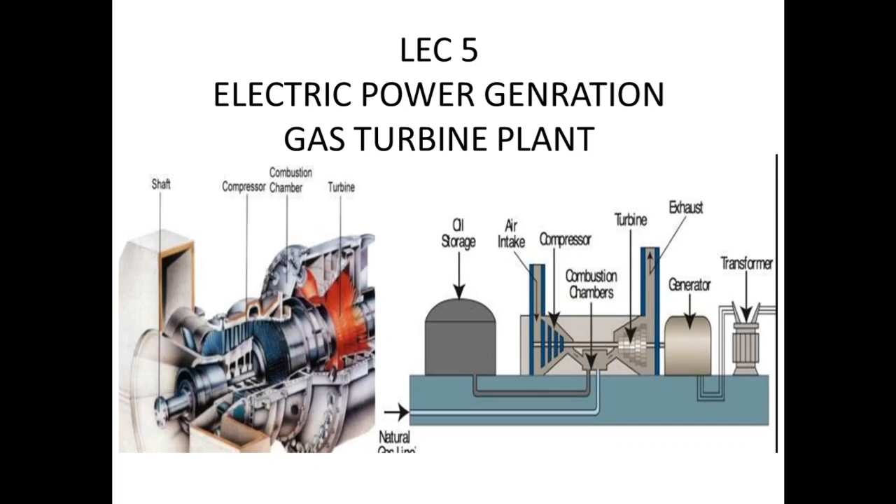In today's session, our topic is gas turbine plant. It is our lecture number 5 of the subject electrical power generation.

Gas turbine is similar in action to a steam turbine used in a thermal power station. Gas turbine plant is also in many respects similar to a thermal power plant. Instead of steam, a hot gas is used. In a steam power plant, the working medium is steam formed from water heated by burning the coal. In a gas plant, the working medium is either a mixture of combustion products and air or heated air at a certain pressure and high initial temperature.

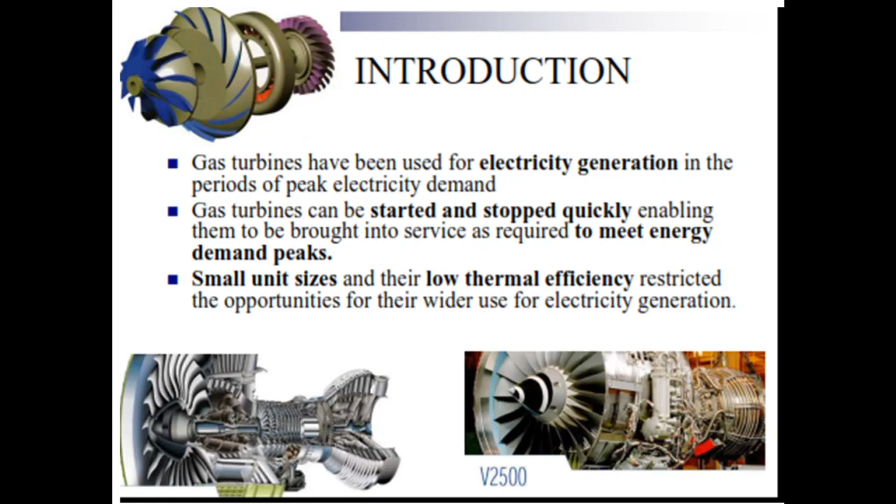Now, the thermal efficiency of the gas turbine is 20 to 30% compared with the modern steam power plant at 38 to 40%. In future, it is possible to construct with efficiency around 45%. Thermal efficiency of the gas turbine is 20 to 30% as compared with the steam power plant.

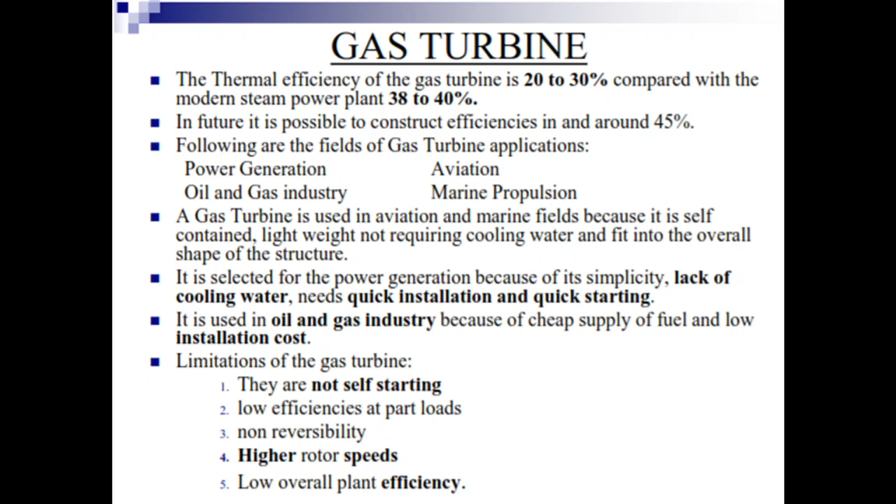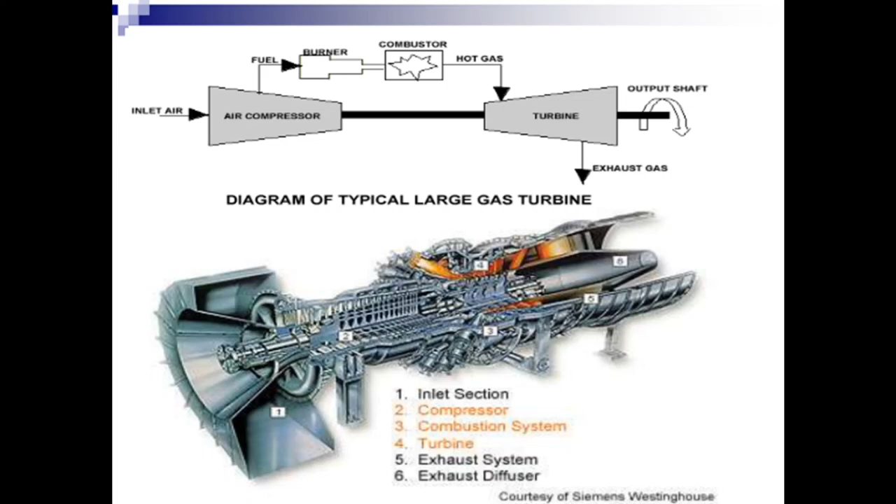This is the diagram of a typical large gas turbine. Here we see the inlet air compressor, combustor, burner, turbine. These are its main parts. Now again, this is the cross-sectional view of the gas turbine.

Now the compressor sucks the air through the filter from the atmosphere, then compresses the air and the pressure increases. It has rotary blades and stationary blades. The compressor is driven by the turbine as it is connected to the shaft of the turbine. The compressor is rotary type. Now, working of a simple gas turbine plant.

Gas turbine plant is defined as one in which the principle of the prime mover is of the turbine type and the working medium is a permanent gas. A simple gas turbine plant consists of turbine, compressor, combustor, auxiliary devices like a starting device, lubricating pump, fuel pump, oil system and duct system. The working fluid is compressed in a compressor which is generally rotary multistage type.

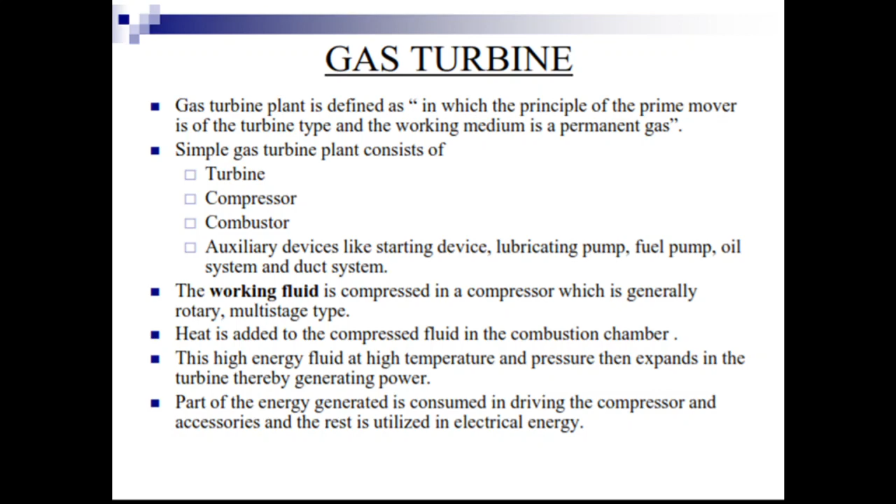Combustion takes place in the combustion chamber by fuel burning due to the high pressure stream of air supplied by the compressor. Part of the air is delivered ahead of burning fuel for cooling the hot combustion products from 1650 degrees to 800 degrees, which do not damage the turbine blades in the first rows. High pressure, high temperature gases pass through the turbine. They expand and the turbine starts rotating.

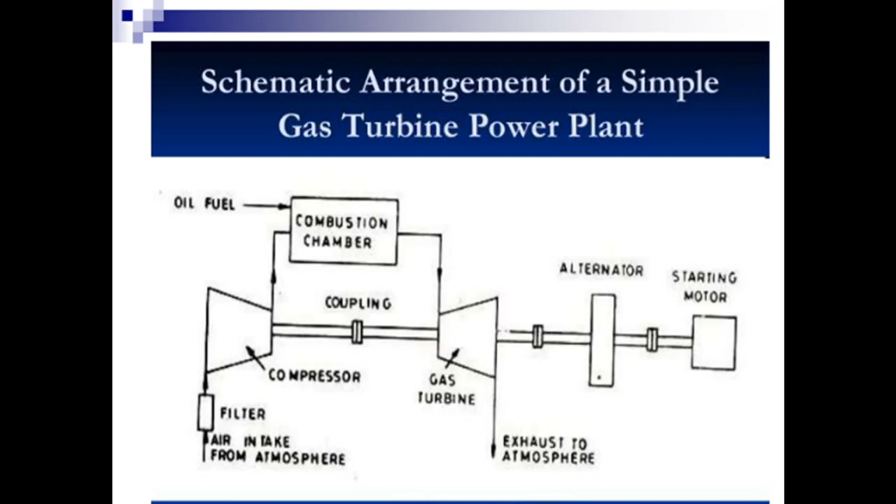Okay, now what are the advantages of the gas turbine power plant over the diesel plant? First one is the work developed per kg of air is more than diesel plant. Next one is the less vibration due to perfect balancing and no reciprocating parts.

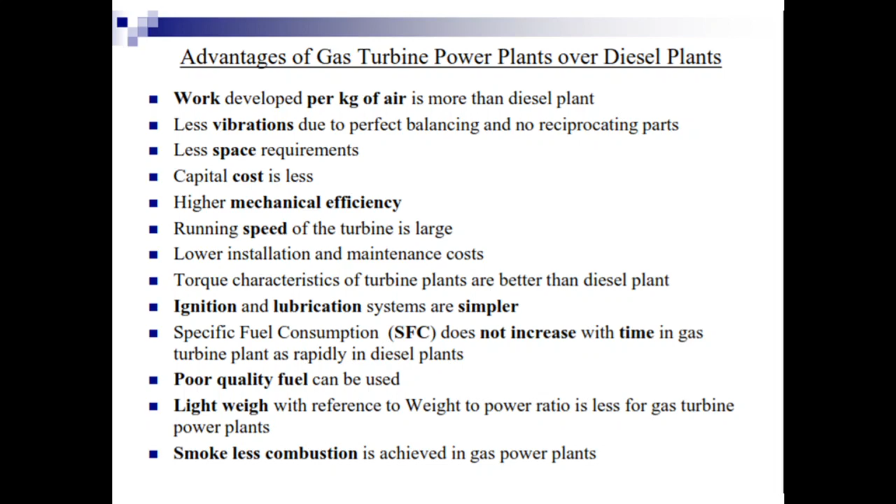Less space requirement, capital cost is less, higher mechanical efficiency, running speed of the turbine is large, lower installation and maintenance cost, torque characteristic of turbine plants are better than diesel plant, ignition and lubrication system are simple, specific fuel consumption does not increase with time in gas turbine plant as rapidly as in diesel plants, poor quality fuel can be used, lightweight with reference to weight to power ratio is less for gas turbine power plant. Smokeless combustion is achieved in gas power plant.

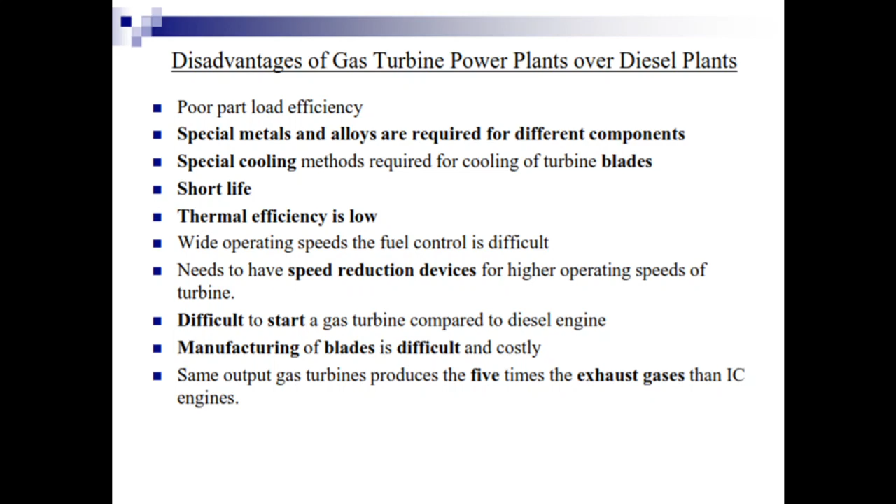What are the disadvantages of gas turbine power plant over diesel plants? Poor part load efficiency, special metals and alloys are required for different components, special cooling method required for cooling turbine blades, short life, thermal efficiency is low, wide operating speed, the fuel control is difficult, need to have speed reduction devices for higher operating speed of turbine, difficult to start a gas turbine compared to diesel engine, manufacturing of blades is difficult and costly, for the same output gas turbine produces 5 times the exhaust gases than IC engine.

Now what are the advantages over the steam plant? No ash handling, steam plant में ash handling plant रहता है, यहाँ पे ash produce नहीं होती, so there is no ash handling, low capital cost and running cost, space requirement is less, fewer auxiliaries are used, can be built relatively quicker, can be brought on load quickly to support peak load.

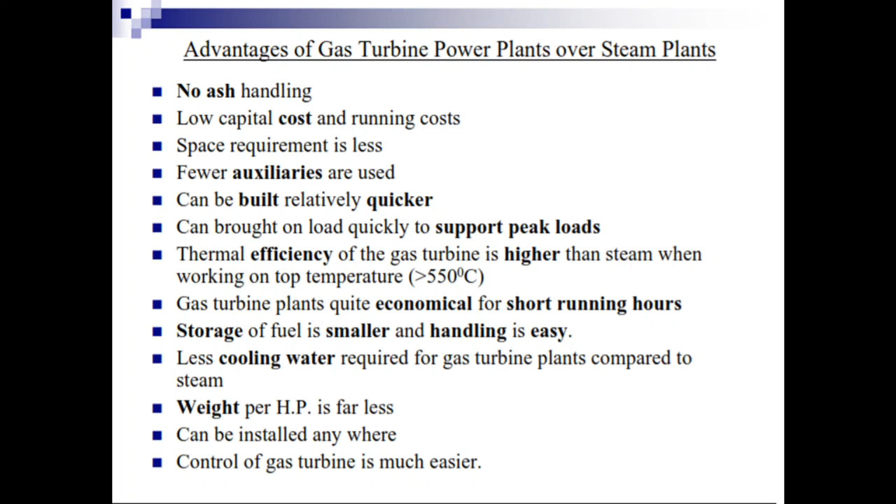Thermal efficiency of the gas turbine is higher than steam when working on top temperature. Gas turbine plants are quite economical for short running hours. Storage of fuel is smaller and handling is easy. Less cooling water required for gas turbine plant compared to steam. Weight per HP is far less. Can be installed anywhere. Control of gas turbine is much easier.

Now, what is the working principle of gas turbine? Air is compressed to high pressure by a compressor, then fuel and compressed air are mixed in a combustion chamber and ignited. Hot gases are given off which spin the turbine wheels.

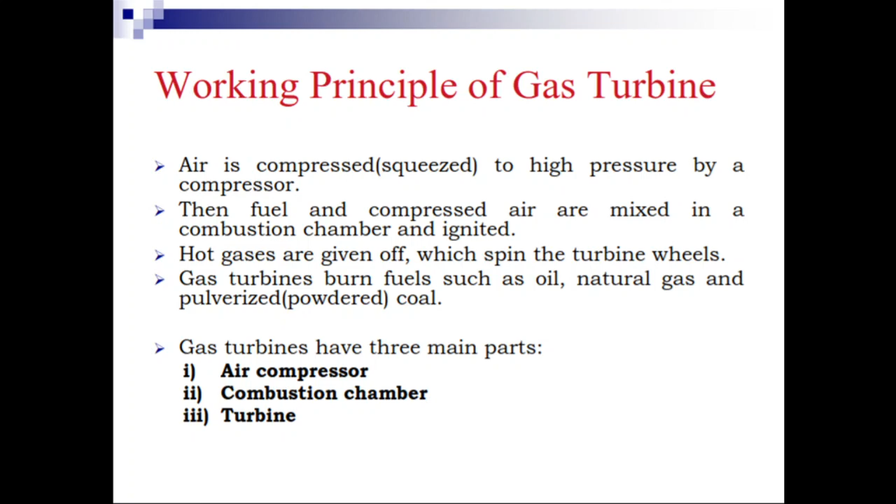Gas turbines burn fuels such as oil, natural gas and pulverized coal. Gas turbines have 3 main parts. First one is the air compressor, second one is the combustion chamber and third one is the turbine. Now what is the function of air compressor? The air compressor and turbine are mounted at either end on a common shaft with the combustion chamber between them.

Gas turbines are not self-starting. A starting motor is used. The air compressor sucks in air and compresses it, thereby increasing its pressure.

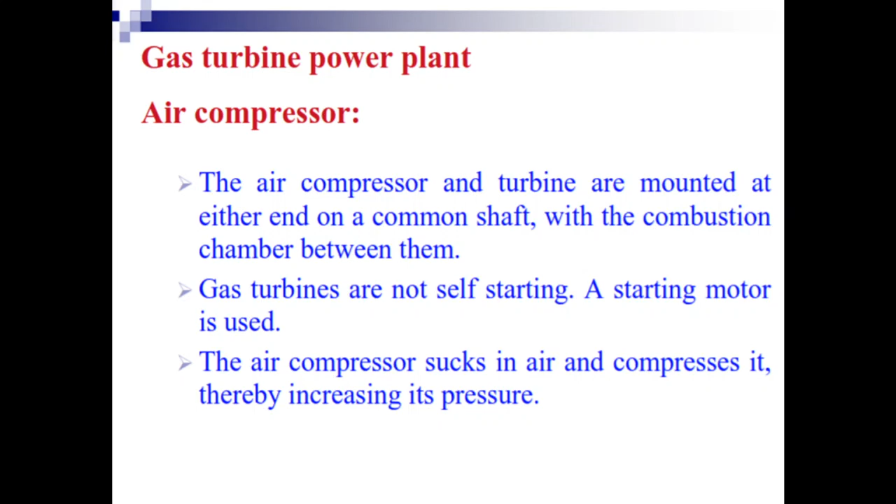The axial flow compressors are used in gas turbine installation. It is the type of compressor. An axial flow compressor consists of series of rotor and stator stages with decreasing diameter along the flow of air. The blades are fixed on the rotor and the rotor is fixed on the shaft.

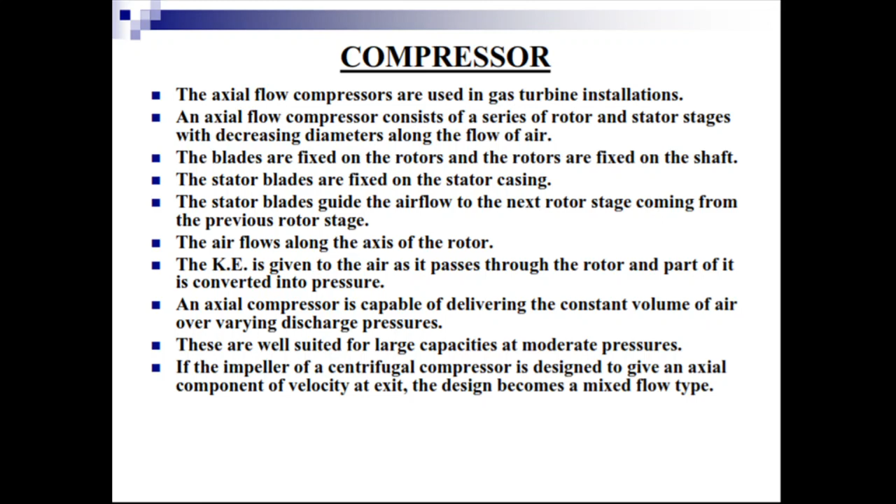The kinetic energy is given to the air as it passes through the rotor and part of it is converted into pressure. An axial compressor is capable of delivering the constant volume of air over varying discharge pressure. These are well suited for large capacities and moderate pressure.

Now, what is the function of turbine? Hot gases move through the multi-stage gas turbine. Like in steam turbine, the gas turbine also has stationary and moving blades. The stationary blades guide the moving gases to the rotor blades and adjust its velocity. The shaft of the turbine is coupled to a generator.